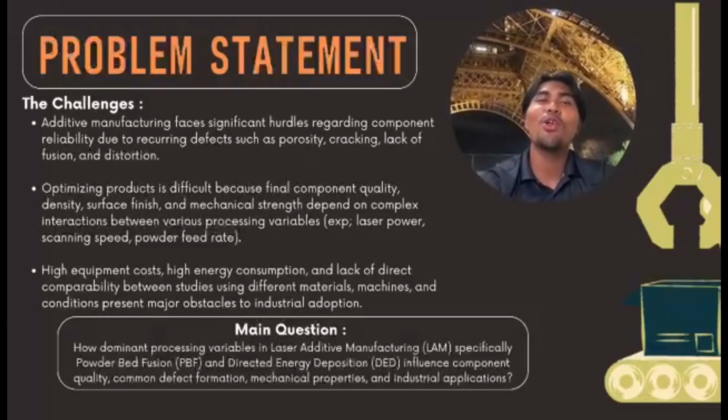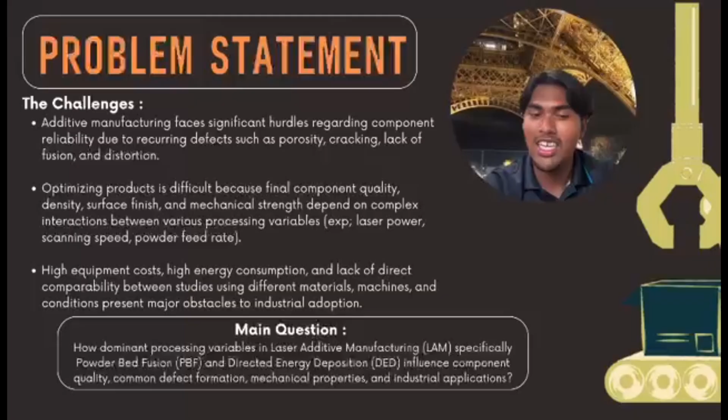Today we're going to talk about the problem statement. The challenges of additive manufacturing face significant hurdles regarding component reliability due to recurring defects such as porosity, lack of fusion, and distortion. Optimizing products is difficult because final component quality, density, surface finish, and mechanical strength depend on complex interactions between various processing variables. For example, laser power, scanning speed, or powder feed rate.

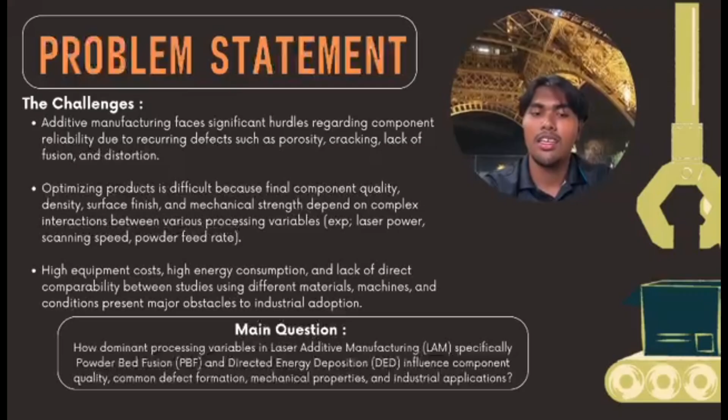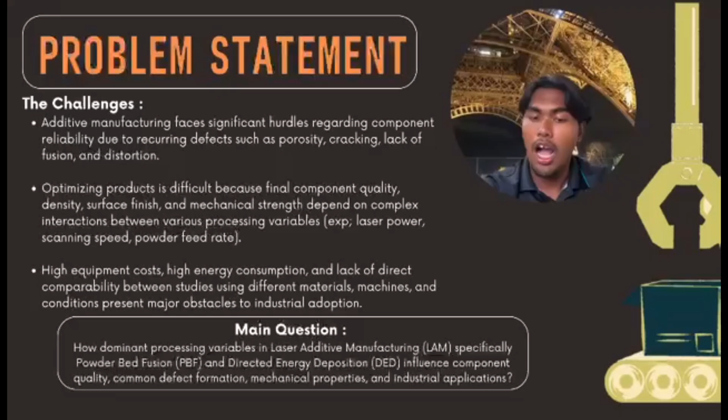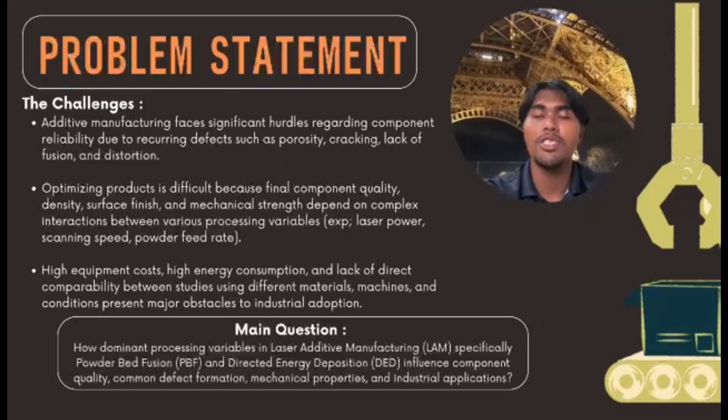Last but not least, high equipment cost, high energy consumption, and lack of direct comparability between studies using different materials, machines, and conditions present major obstacles to industrial adoption. The main question is, how do dominant processing variables in laser additive manufacturing, specifically powder bed fusion and directed energy deposition, influence component quality, common defect formation, mechanical properties, and industrial application? Next.

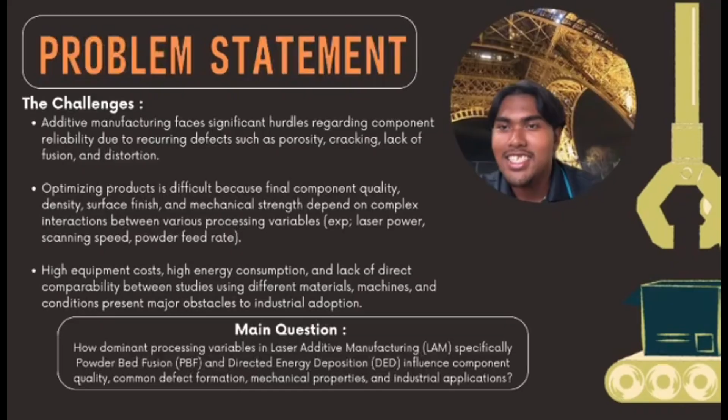Now I will explain the methodology used for this study. The authors conducted a literature review by analyzing and comparing previous studies related to laser additive manufacturing, known as LAM. The review focused on two main technologies, which are powder bed fusion (PBF) and directed energy deposition (DED). The authors also examine important processing parameters such as laser power, scanning speed, and powder feed rate. These parameters can affect the quality and performance of the final component.

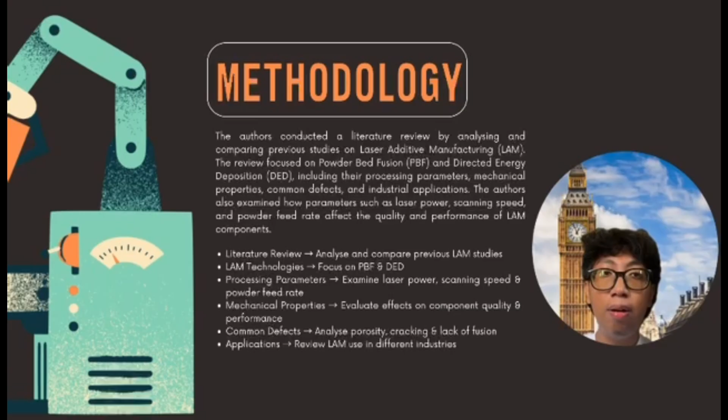Besides that, the study looked at the mechanical properties and common defects such as porosity, cracking, and lack of fusion. The authors review the industrial application of LAM and how it can be used in different industries. Overall, the methodology helps us understand how different LAM technologies and processing parameters affect the final product.

Main findings. The first one, parameter property dependency. Processing parameters, for example, laser power, scanning speed, powder feed rate, directly dictate melting behavior, material deposition, density, surface finish, and overall mechanical performance. Second one, industrial utility. Laser additive manufacturing enables the production of highly complex geometries, lattice structures and component repairs that are difficult or impossible via conventional manufacturing, serving high-value sectors like aerospace, automotive, biomedical, and energy.

Third one, interconnectedness. Final quality in laser additive manufacturing is not governed by a single isolated variable, but by the holistic interaction between material type, machine characteristics, processing conditions, and the manufacturing environment. And lastly, identification of core defects. Improper parameter selection leads directly to critical defects, primarily porosity, cracking, lack of fusion, and also thermal distortion.

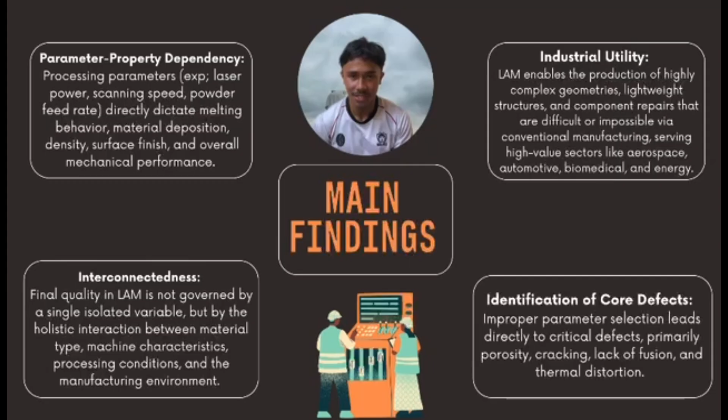I will explain the key limitations of this article. Firstly, the article has a broad and unfocused scope. It covers many topics such as technologies, defects, process parameters, material properties, and applications. While this gives a broad overview, it does not discuss each topic in depth. Second, the article lacks a systematic methodology. It does not clearly explain how the references were selected, which reduces the transparency and reproducibility of the study.

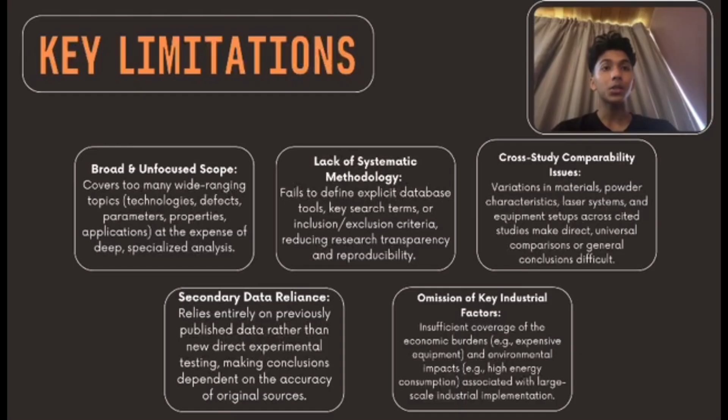Another limitation is cross-study comparability. Since different studies use different materials, laser systems, and equipment settings, it is difficult to make direct comparisons or draw general conclusions. The article also relies on secondary data instead of conducting new experiments, so its conclusions depend on the accuracy of previous studies. Finally, it gave limited attention to industrial factors such as equipment costs and environmental impacts, which are important for large-scale implementation. Overall, although the article provides valuable information, its limitations suggest there is room for improvement in future research.

Hi, my name is Muhammad Arish Razani bin Shafizat, and I will continue with the significance and relevance of findings. There are 3 points that I will be explaining to you. The first one is engineers and designers. They provide vital insights into how process parameter control directly prevents structural failure, assisting in product optimization and quality assurance in mechanical engineering. So, their role is to make sure that everything goes smoothly.

The second point is industrial production. It highlights LAM's ability to reduce material waste, enable component repair, and manufacture complex lightweight designs across key sectors such as aerospace, automotive, medical, and energy production. And last but not least, the third point is academic or educational value. It serves as an accessible single source, a foundational reference for students, researchers, and newcomers seeking an integrated view of laser-based additive manufacturing systems, which is very important for future use.

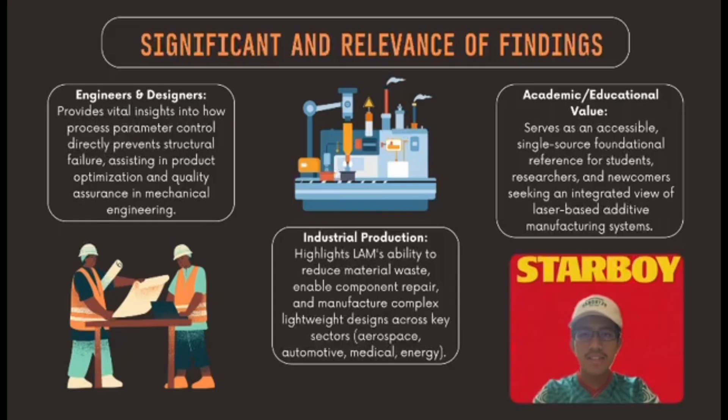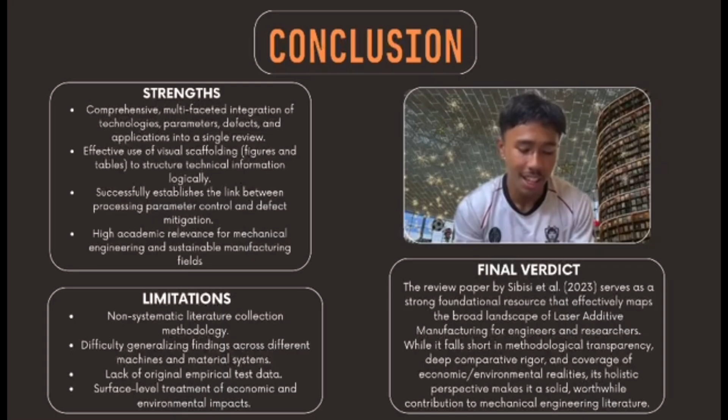In conclusion, in terms of strengths: comprehensive, multifaceted integration of technologies, parameters, defects, and applications into a single review. Second, effective use of visual scaffolding, figures and tables to structure technical information logically. It successfully establishes the link between processing parameter control and defect mitigation, and has high academic relevance for mechanical engineering and sustainable manufacturing fields. The second one is the limitations: non-systematic literature collection methodology, difficulty generalizing findings across different machines and material systems, lack of original empirical test data, and surface-level treatment of economic and environmental impacts.

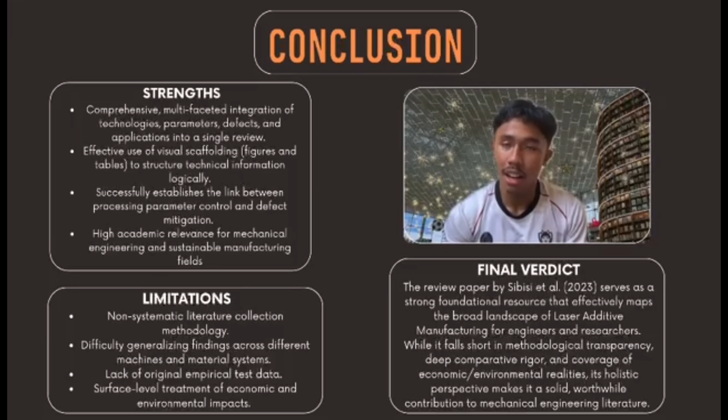And the final verdict, the review paper by Sibisi et al. in 2023 serves as a strong foundational resource that effectively maps the broad landscape of laser additive manufacturing for engineers and researchers. While it falls short in methodological transparency, deep comparative rigor, and coverage of economic and environmental realities, its holistic perspective makes it a solid, worthwhile contribution to mechanical engineering literature.